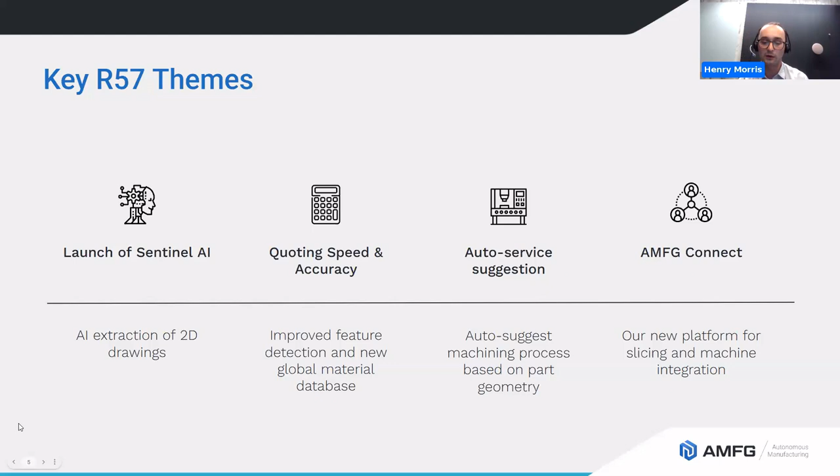Yeah, if I just talk a little bit more generally, we do at AMFG 3 to 4 releases in a year. This one being the second of 2025, and we really have one key theme per release. And if you go back to the last slide where we said our mission is to enable faster and accurate quoting for small, high complexity shops, with this release, we really have built a number of features for CNC shops.

So for additive quoting, we started that journey maybe 5 to 10 years ago, and we're quite solid in that space. These features we're releasing here are really going to plug the gaps on the CNC side. So one, with our Sentinel AI, we're able to extract much more information than just the 3D file. Similarly, with improved feature detection, all of this is giving us more data on the files that you upload into AMFG, so that our pricing scripts have more data to work with and can be more accurate.

And then thirdly, with auto service suggestion and materials, we're almost lowering the barrier at quoting so that someone who's maybe a more junior estimator can still quote effectively using AMFG. So the key for R57 is rounding off kind of the CNC quoting package. Not that there won't be more improvements in the future.

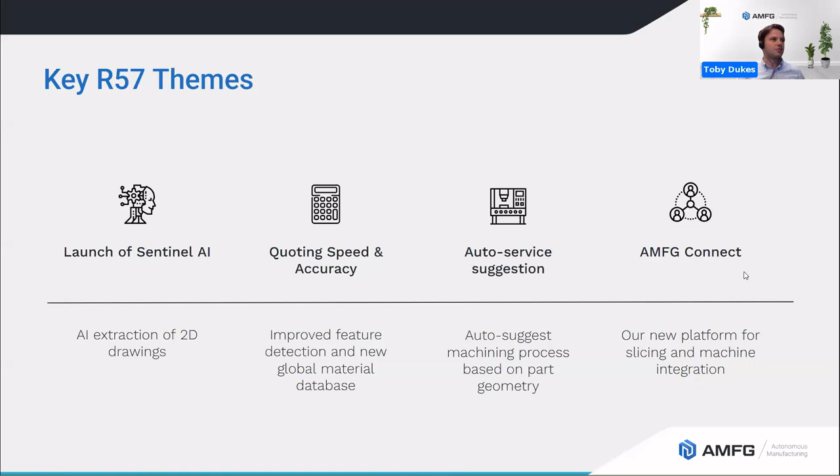And then as we look to our next releases, so R58 scheduled almost for the end of the year, we look more to production, and that's really what AMFG Connect and integrating with slicing and build preparation software is preparing for. So we have kind of 3 key themes on finishing off our quoting package, and then 1 theme on the start of our next big package. So really exciting new features here.

And I guess that leads quite nicely into the first one and maybe the main story point of this release 57. So we are releasing, as Henry said, our own AI extraction model for PDF data named Sentinel. So when we started CNC quoting, it's all about how much data we can get from files. And we started with 3D files with STLs, trying to extract the features, so holes, pockets, islands, through holes, all those 3-dimensional features from the file.

But we realized when we started this journey, we were limited in that information. Unless there's, say, PMI data, we're missing critical dimensions in tolerance, in surface roughness, in threaded holes. That's all going to add on cycle time and therefore going to add on cost. So moving on from our 3D data extraction, we're extracting data from the 2D drawing directly using our model, and we're automatically adding that into our pricing scripts, all with the aim of quicker and faster quoting.

So more specifically, you can upload your PDF alongside your 3D model in AMFG and extract material type, extract general tolerance, dimensional tolerances, surface roughness, and threaded holes. And you can use this instantly in your quote.

And maybe just to jump in here, Toby, I think you can probably follow up on this. I think really this is a big first step in our 2D data extraction journey. Setting this up has taken a long time. It's put a lot of resources into it, a lot of development time to building Sentinel and actually launching it. But I think now we've actually got it live, the kind of next steps in what we can extract is really the world's oyster.

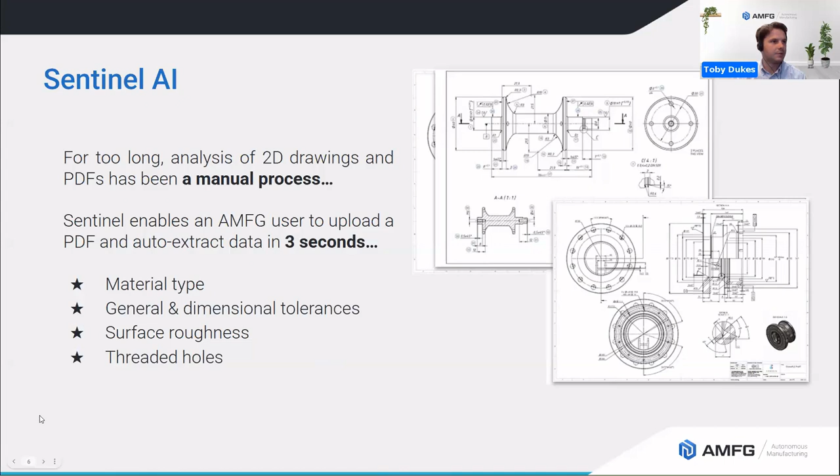Yeah, absolutely. Should we move on? Let's move on.

Number two. Again, this follows on. It's all about the amount of data we can extract, like I said at the start, from the model and then from the PDF to get that accurate quote. The features that we're drawing from the STL file or the STEP file, whatever you upload, are really the core of how we quote. So we're improving our feature detection and we've made it more rigorous. We're detecting almost 90 to 95% of features on the part, and we're adding new features to that list. So previously, where you had maybe just a hole and then a pocket on that, we can now detect that as counterbore and countersink, which means we can be more accurate with the tool and the cycle time, as we know you can get one tool in there.

So we've made our CAD interrogation program more sophisticated. We're counting fillets and chamfers, counterbore and countersink holes, slots, and steps. This really rounds off what we're calling the core features of the part. So after release 57, we think we have the most robust CAD interrogation system on the market. But what we're moving to next is to detect what we're calling difficult to machine features, one of which is self-intersecting holes. They're normal features on the part, but maybe an area of the model that would take a different machining strategy or a longer cycle time. We're trying to call that out to you when you're doing a quote: one, to add on machining time for the quote, and secondly, when you take that into production, as a flag on the part that this may be difficult or even impossible to machine.

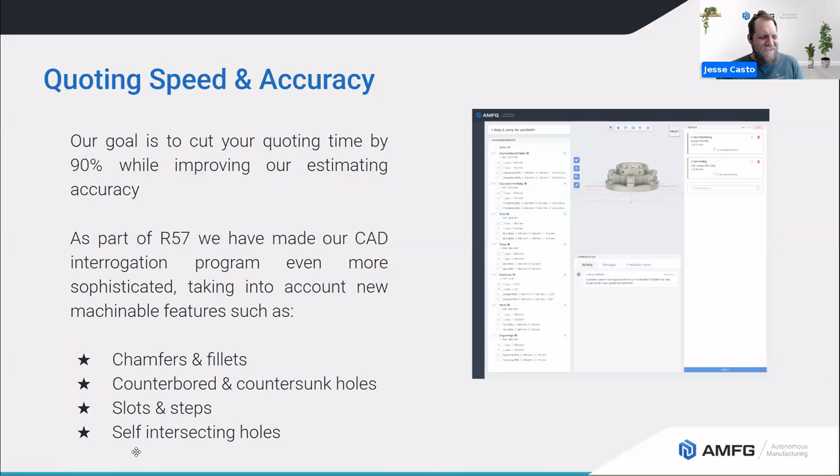Okay. Next feature then. So again, new in 57. We realized we had a gap, like I said before, in tolerancing, and specifically assigning tolerancing to features. We realized through speaking to a lot of customers that whilst our feature detection is accurate and we can get a good cycle time, maybe the one most important thing we weren't considering was the effect of tolerance on that cycle time. So obviously, if you have a tight tolerance, 0.05, 0.01, on a specific through hole, that can add on 20 minutes, 30 minutes cycle time per hole.

And this was one data point that we weren't really capturing in our scripts before. We can now say with a lot of pride that we're able to do that. So we can assign a tolerance or a surface roughness to a feature. We can assign it to holes, fillets, planes, pockets, whatever 3D feature you might want. You could assign the tolerance or the surface roughness, and we can automatically update our pricing scripts based on that tolerance, which really means for those highest complexity parts where tolerance is such an important factor to cycle time, you're able to quickly and easily factor that into the quote. So again, leading back to our theme of accurate quoting and fast quoting.

I think it leads on to a future when we move into production where we already know tolerances that are on these specific features. So when you go to machine that through hole with the tight tolerance, we can flag that to whoever's producing it. But at this moment, we're getting as much data as we can on the model, and I think tolerance was the one part we were missing. So really excited to bring this through. I think this is probably the number one, aside from maybe PDF data extraction. It's probably the most requested feature for the CNC machining product in the last 6 months, probably even a year now. So it's really exciting to see this come to fruition.

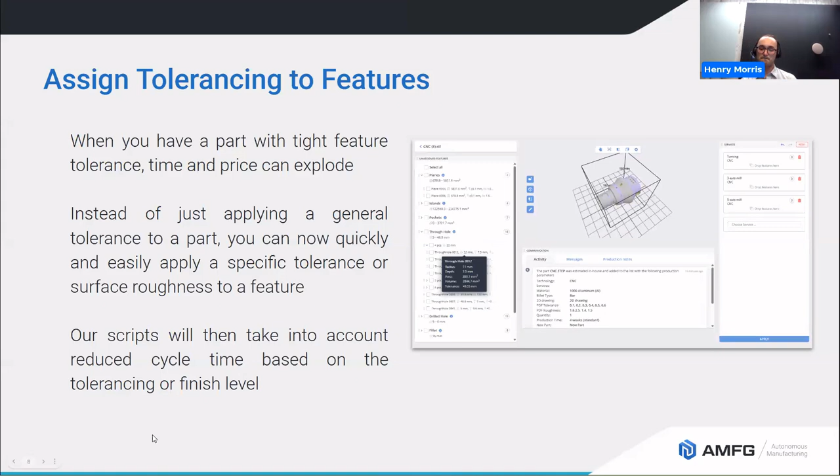And maybe the unsung hero, as I'm calling it, of our release. Not the most fancy or the most attractive feature, but one that brings immense value to our users is our new global database. This has been a huge piece of development from our team, so we're really excited to bring this one forward. Just to set the scene for people who've never used AMFG, we previously had roughly 400 materials in our database, and everything else, materials cost, feed rates for milling and turning, was managed through our pricing scripts, which meant if you wanted an update, it would come via the AMFG team.

So we can now say we've added a new global database based on the top 3 material suppliers worldwide, of which we have 10,278 materials, I believe. Very precise, Toby. I like it. I'm going to eat my words if that's wrong later, but it's around that number.

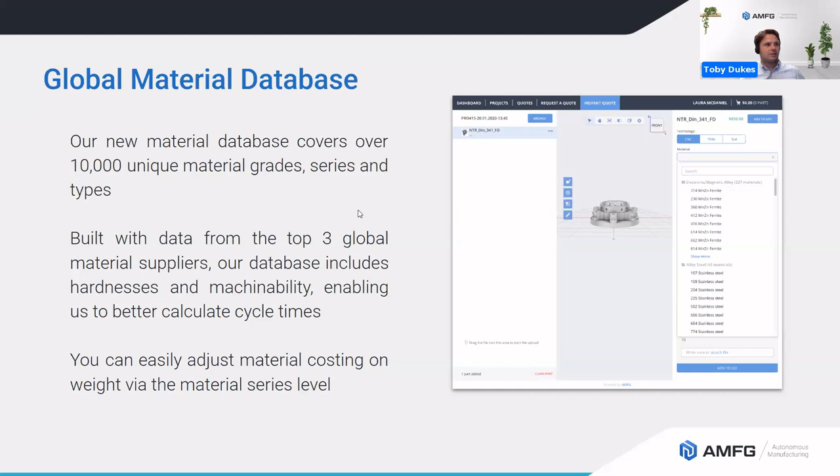So maybe if it's got a lot of cylinders, we'll suggest turning. We can suggest milling, turning, drilling, whichever operations you have, automatically when you upload the part. You can obviously edit that. You can maybe change 3 for 5 axis if you prefer to run it on that. But what we're giving you here is almost a baseline recipe of how you may machine the part. Again, it leads on to our accuracy in quoting and our speed in quoting. You upload your file, you've auto-suggested services, and then you have a price.

So what we really wanted to do with this release is almost give a 2-click approach where you upload the files and AMFG does everything else for you. You have your costs and the materials, you have your services assigned automatically, you have all the data that we can extract pulled, and then it's really up to the user. If you don't like the cycle time, maybe you add a tolerance manually. If you don't like the material costs, you can go and adjust that. You can assign features to services, which will adjust the price.

But we're giving you a 2-click approach to get as accurate a price as we can, and then leaving it up to the user to make those small end tweaks. Obviously, with the theme of accurate quoting, we aim to make that as limited as possible, but we realize we need to give the shops the power to edit that. So this is kind of the last stage of that.

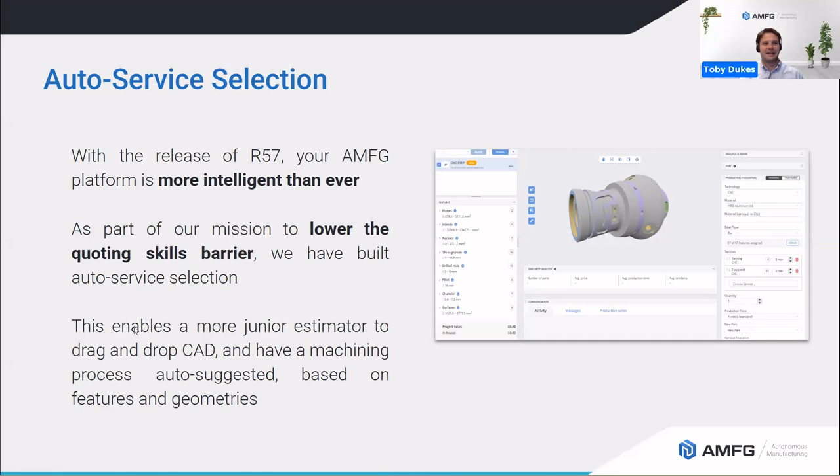Enough talking. Okay, Toby, I'm going to steal the screen and we'll get into a bit of a demo here. As Henry knows, slides are my least favorite thing in the world, so I'm very excited to get off them and into the AMFG app. And look at this, to say I'm working in a tech firm, I'm pretty slow here. Let me know when you guys can see what I'm sharing.

All good. Awesome, fantastic. So I thought we'd start off by giving a bit of overview of how AMFG works right now, to give you a live overview of our calculation procedures, the way that we get to a geometric analysis, how we get a time and a cost result. And then Toby's going to jump in and show how we're going to improve that with the new R57 functionality.

So obviously skipping over some of the more basic parts of the AMFG system, like the dashboard, where we're tracking analytics and KPIs, and our email integration, where you can have your emails linked, so you can see your emails coming into your inbox from RFQs at Better CNC or any other emails you'd like integrated, we're really looking today at tickets overview, the quoting and estimating module of the AMFG system.

So in here, we can see all of our part statuses. We can see as those RFQs come in, where they've come from, whether it's from a website inquiry, an instant quote portal like Jesse's, whether it's from an email, or maybe you've manually created this ticket, this RFQ. We can attach priority statuses to earmark how urgent that quote may be, how quickly your customer might need a response. We can have your own ticket numbering system. We can have an activity log to track what's happening and when.

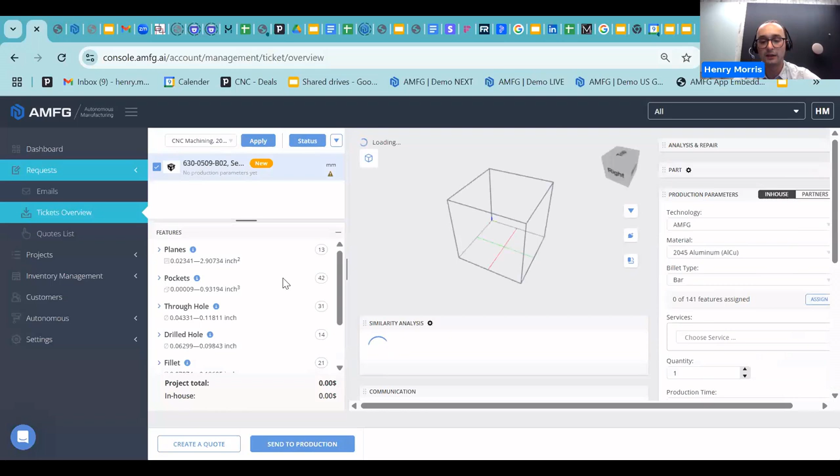Now I'm going to also choose my customer. Obviously, if this came from an email, I'd already have that customer pre-selected, but let's say I've just done that manually. And now we can actually load into this part and start taking a look at how this part looks. So as soon as I load that part in, the first thing that I can see is probably these pink blobs, our geometric analysis on said parts. And we've got to repair that part as well.

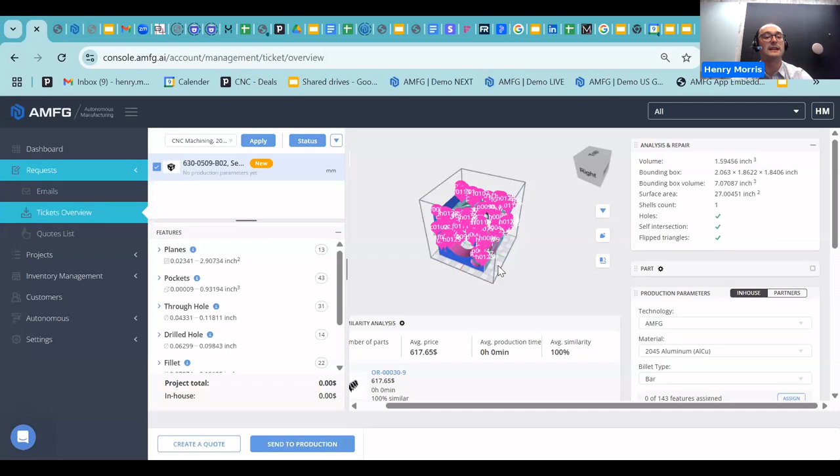Now, when we hit repair, we're converting this file from one of the 30 different 3D CAD formats that I mentioned earlier to an STL file format. That then allows our CAD interrogation program to do a full geometric analysis on the part and pull out all of the different machinable features and the part analysis here in the top right.

So as Toby mentioned earlier, improving and making our feature recognition more sophisticated has been a key development priority for us. How many different machinable features is it that we can identify now, Toby? To put you on the spot. I love being put on the spot. It's fine. There's 9 machinable features that are available. That includes planes, pockets, through holes, drill holes, fillets, chamfers, counterbore, countersink, and islands. I really hope that was 9 that I just said.

Like Henry said, we pretty much reached the limit of all our machinable features that we want to pick out. All we need to do now is flag difficult to machine features, so maybe undercuts or holes that are self-intersecting, to make this more robust. Definitely. Well said, Toby.

So as Toby mentioned there, we're pulling out all of those different machinable features, and we're also looking at the profile of each of those features. So for a through hole here, we know the radius, the depth, the area, the volume. If we take a chamfer, we know the angle and the height. So we're building up a very good geometric profile on our part.

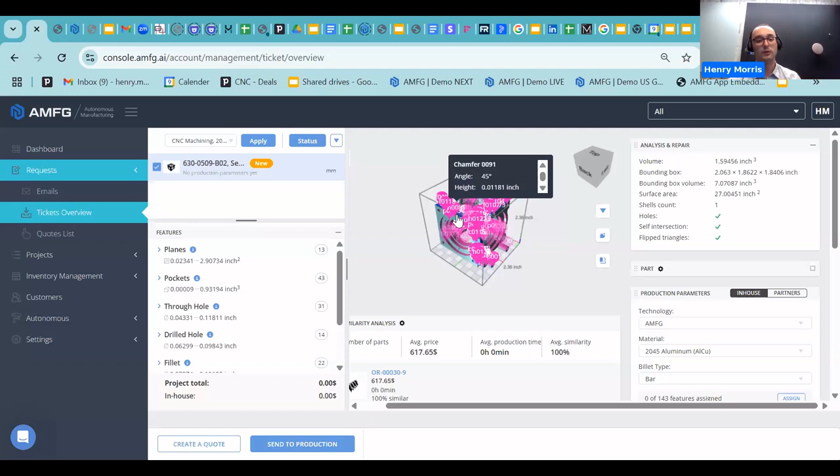We also know the volume, the bounding box volume, surface area, which is obviously all really important as well for calculating our material price based on weight, the density of that material, and also for secondary processes based on either the weight again or the surface area of the part.

Now, before we jump into actually estimating on this component, we can also have a look at our similarity analysis. Similarity analysis really is a bit like a third eye in the quoting process. We're basically comparing this new part to all of our historical parts that we ran through AMFG, normally based on the material, the bounding box, maybe even the machinable features on that part, and spitting out a list of similar parts that you might have machined in the past.

So really great for part families, and also really great for repeat work that you might have forgotten about, maybe you want to forget about that repeat work, or maybe it's work you've done in the past, but a new estimator like Jesse's new guy doesn't necessarily know that you've done that in the past.

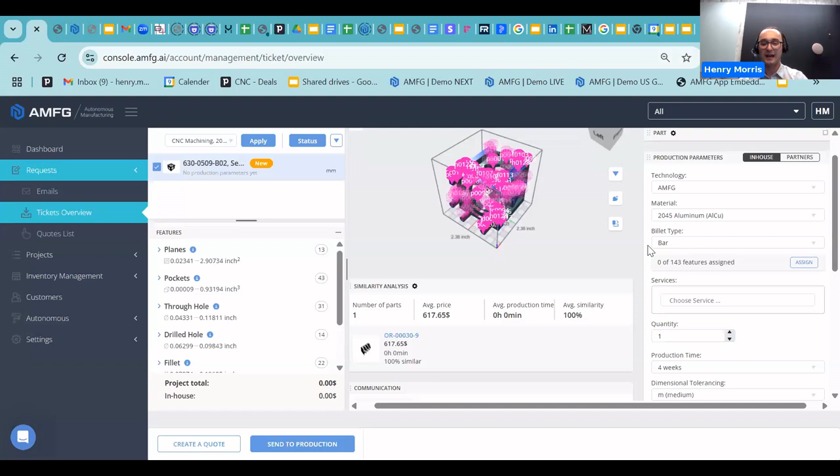Now, if we go into actually generating an estimate, we're going to look at production parameters on the right-hand side. And obviously with this new update, there's been some pretty big changes in what we've actually automated in this quoting workflow. But this just gives you a rough idea of how quoting might look in AMFG. So first of all, we can choose material, and we've got that new beautiful global database that Toby was very proudly talking about earlier. So I can select my material.

We know the hardness and the machinability of that material. We can choose a different billet type if we want to change that based on whether we're machining here from a bar, a solid round, tube, plate, casting, and a few more. And most importantly, we can now also choose machinable features, machinable surfaces and processes. Now, obviously, as Toby mentioned, we can now suggest that ourselves if you wanted to have that automatic suggestion, or your estimator can come in, choose a service, and we're then going to create a calculation based on that.

So our scripts in AMFG are now quite highly sophisticated. We've done a lot of work to them over the last couple of years. And what they're able to do is accurately ping back a cycle time, programming time, setup time, and number of setups on this part. We can then see that for this part here, there's quite a lot of features, and we've also chosen, I think, machining from a bar. We have 33 minutes as our cycle time, 546 minutes as my programming time, 210 minutes for setup, and 2 as our number of setups.

Just conscious of time to quickly explain how we got to those numbers. Cycle time, we're looking at all of the different machinable features on this part. We're then looking at the material and the hardness of that material, any tolerancing or surface roughness factors that have been added in. And then we're basically auto-assigning a tool, either from AMFG's library or toolbox or your own tooling data, to match a tool to each of those machinable features. We're then calculating a material removal rate based on those factors. That then gives us our cycle time.

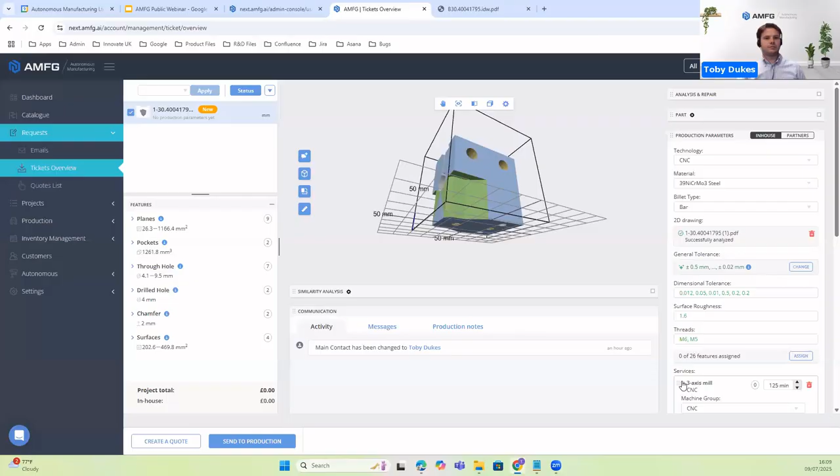Now, on that note, I'm going to hand back over to Toby. That's where we are now, and Toby's going to show you what's coming out on Saturday. Yeah, thanks, Henry. If you just unshare again, and then I can share my screen back. Okay. See that okay? Okay, so

Building on from what Henry said, I'm now in our next application, which has all our new features on that will go live on Saturday. So you can see largely a similar screen. We have our list of features on the left-hand side. We have a new viewer, which is showing the features in colors rather than the dots you saw. And we have some widgets that are now made collapsible by popular request.

I think the real key difference, though, comes in the production parameters widget, which is the heart and soul of the quoting tool. So like Henry had all of his fields that he was able to manually configure. We now have a new field of 2D drawing, of which I've added the PDF for this file. And you can see below this, I'm able to extract my general tolerance, my dimensional tolerances, my roughness and my threads.

So when Henry was clicking through all this information manually, all I've done for this file is upload the 3D model, upload the PDF, select a material, and select 3-axis milling as my service. And you can see all those steps that Henry just did, I'm already at my price. So the key is we're uploading just 2 pieces of information. We're gathering everything from that. We're using these features from our 3D file, plus the information extracted from our 2D file in the scripts that we talked about earlier. And we're using that to generate this price here.

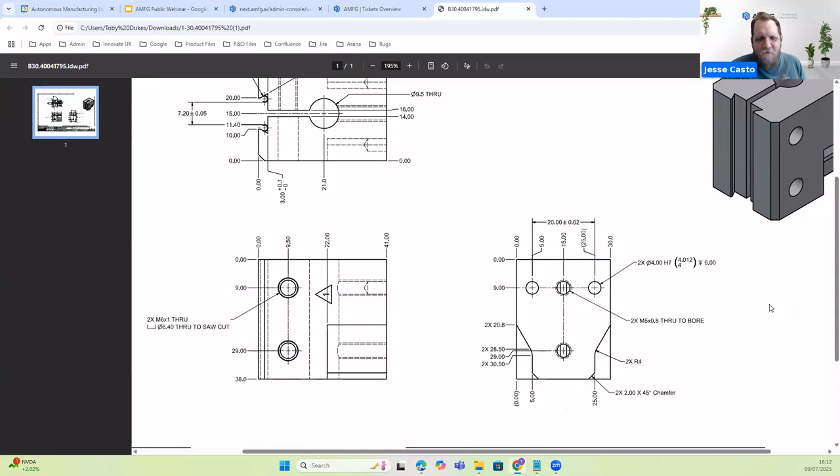If you look over the drawing a little bit, you'll see tolerancing in different formats as well. Like you got the H7 where it's 4.012 to 4. The top left, you got plus minus 0.05. And the PDF analysis is actually not just looking for a key, like it's not just looking for the plus minus symbol. It actually is able to recognize the different formats that things are written in. Which means it's not just a generic slap AI on it, look for these phrases, but it's actually analyzing it and pulling out the different types of formats, the different types of callouts, both for threads and tolerances.

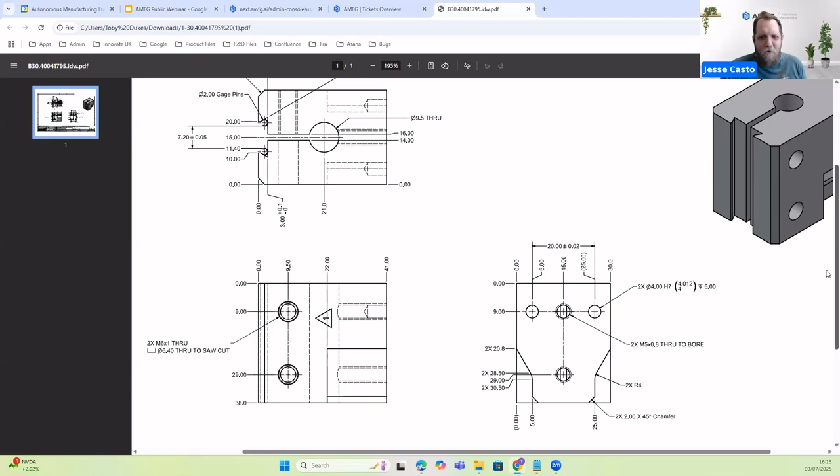And then if you scroll down to the tolerance block at the bottom, it's able to recognize that over on the left. It's also able to pick that out and pull out your generic tolerancing levels as well. So it's not just we're slapping AI on it and it's just looking for a keyword, but it's actually looking at it and pulling out key features that you can set up to affect your price to the customer so that the quote is as prepared as it could possibly be before you even dive into it to quote.

Exactly. Thanks, Jesse. I think the key for this with us was extracting as much information to use in quoting. Where we use automated scripts for quoting, we have to run the same thing every time. So if on one condition we pull it out as plus minus 0.2, and then the next file you upload we do 4 to 4.012, there's no way we can consistently use that in our script. So we've really tried to pull it out in a very consistent way to get instant pricing.

I think the next thing to show then is our new material cost. So you can see now from Henry's viewer, we got a new view where I can search from all the materials from AMFG or just the ones that a specific shop has selected. I can view my recent materials that I use most often, and I can review full families in these folders. So I can search by my titaniums and select a grade there. You can see I've gone for a steel alloy, and I'm now going to change to a titanium.

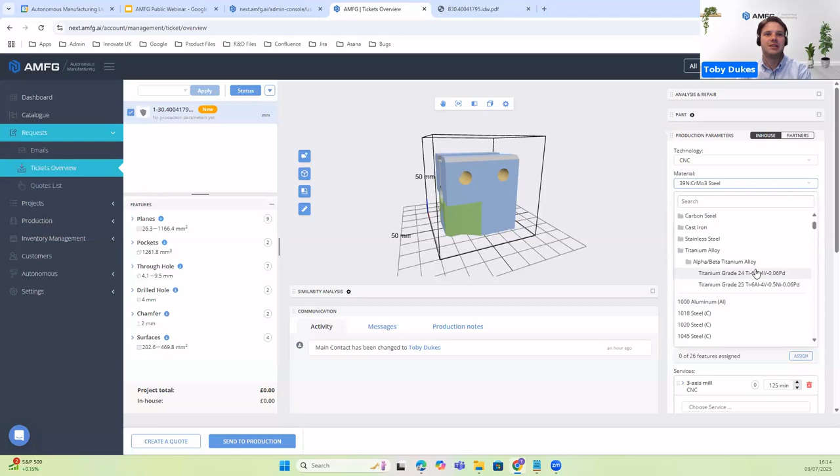And this is automatically going to factor, one, the different cost per kg of titanium, but two, the different feed rates of that titanium. So maybe I'll have to run my milling machine slower if I'm using this titanium material, and that'll automatically input the cycle time and the production cost, which is what we call the material cost. And if I don't like that, I can go into production parameters, which I'll show you in a minute. It's almost our data storage hub. And just update those values as they change.

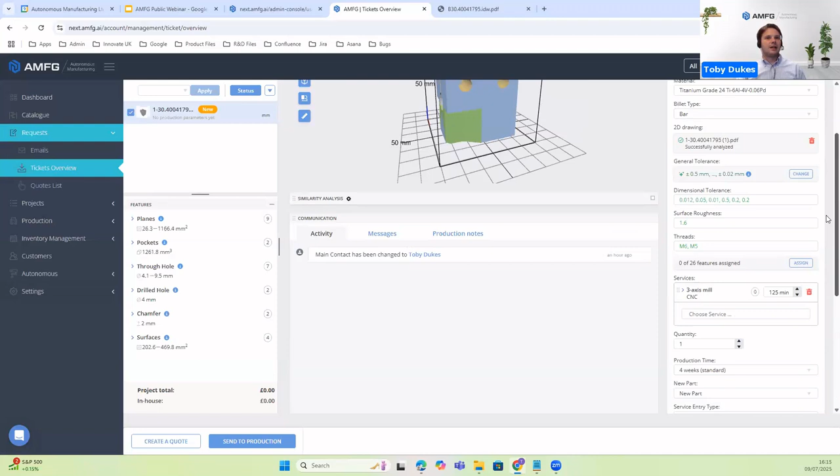So the key thing is I've filtered my materials by categories. I've changed some parameters, and my new materials give me a very different cost. I think next, let's look at specific tolerances.

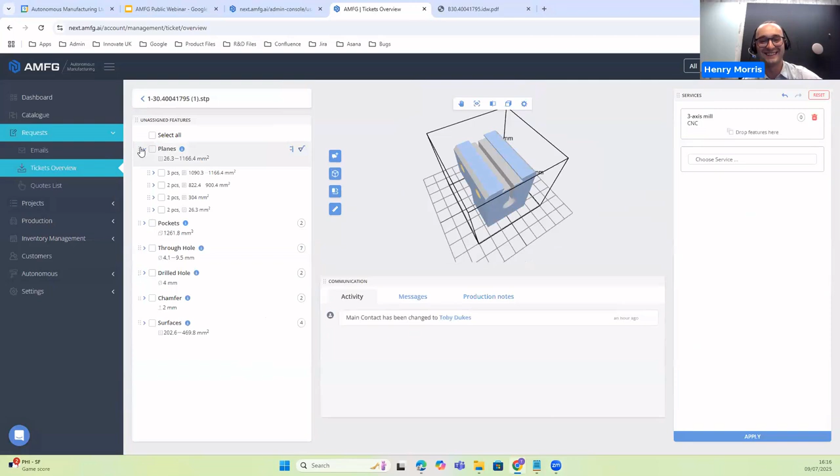I cannot believe there's only 15 minutes left. It's so exciting. Time flies when you're having fun. My brain goes into overdrive when I think about tolerances.

Okay, so here we want to go one step further. It's not enough to just extract the tolerances from the PDF. We want to assign specific tolerances maybe to holes or to drilled holes, because we'll use a different tool for that hole, or we'll use a specific machine, and we want to say that we have to run that machine slower for this hole. So what we've allowed you to do is come onto this assign features page, and you can set a tolerance or a roughness per feature or for all features.

So for this example, I'm just going to set a tolerance of 0.001 upper lower limit. And you can set a limit that can only be higher than a certain point, or there's plus minus. I will assign that to all through holes. So I can now see on each of my holes, I have this tolerance input. I can do the same for roughness.

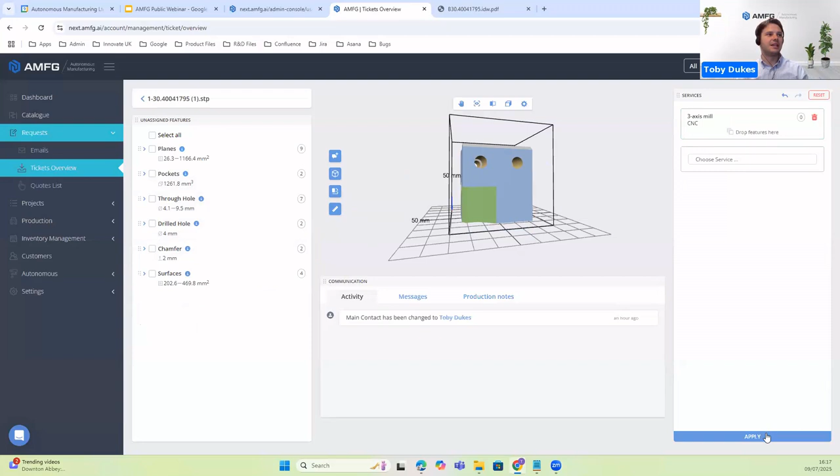If I wanted to, I could assign these holes to a service. So I could say, actually, I'm going to use 3-axis for all my through holes and drilled holes by just drag and drop. And maybe for the chamfers, for the fillets, I might use 5-axis. But the key thing here is once you've assigned your tolerance to the hole, we rerun the price. You can see previously we had 733 for 3-axis milling.

Because we've assigned those tolerances to those features, our scripts understand that we need to slow that machining time down when we machine those holes, and therefore the cycle time is longer, and the cost of 3-axis milling has also gone up. So it was 730, now it's over £1,000. So the tolerance can really add on a lot of time and a lot of costs. So if you have those really high complexity parts where an accurate quote is essential, you can go through this extra step to get a more accurate price.

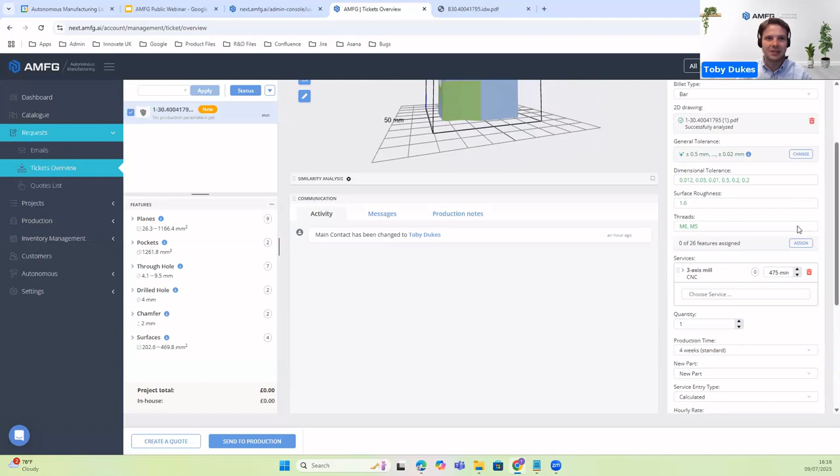And I think this leads on to where we're going with our PDF extraction and with our tolerance assignment. Obviously, we have information from the PDF of what features these tolerances are on. We have our 3D features here. I think the next step for us to really automate all of this is to match these 2D tolerances to these 3D features and essentially automate the step that I've done here. So where I've manually come in and added a tolerance, we want to automate that step so it really is just the 3D, the 2D, and you're good to go.

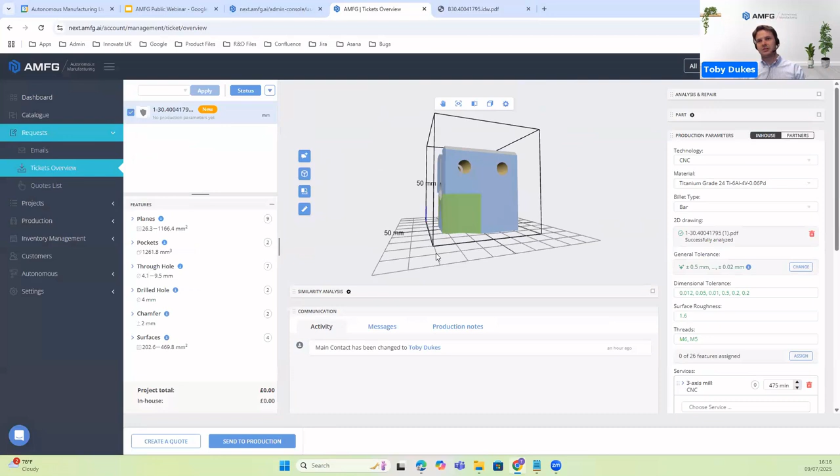Jesse, it'd be great to hear a few of your thoughts as well. Obviously, we've spoken about this quite a bit over the last 6 months about the impact of PDF support and how you're applying tolerancing. How have you found that so far?

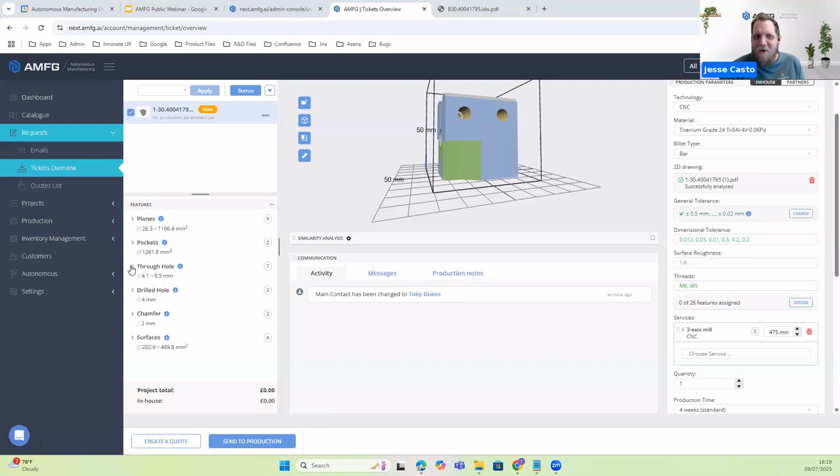Yeah. Nice thing too is as you apply tolerancing, the way it affects the price, you can also do it for specific features. Like if you have a tolerance on a through hole versus on a pocket, you can apply it differently. Being able to do that helps you pass notes or remember things as well. If you quote something and you win the order 2 months later, you have reminders for you.

One issue I used to have at another company when I did quoting, we did finger in the air quoting, where you look at it and you go, okay, that needs to be about 20% higher. Classic. Being able to add these tolerances to specific features gets rid of that variance. You could look at a hole one day and say, oh, that's no problem. You look at it a couple days later and you're like, oh, that's going to be a

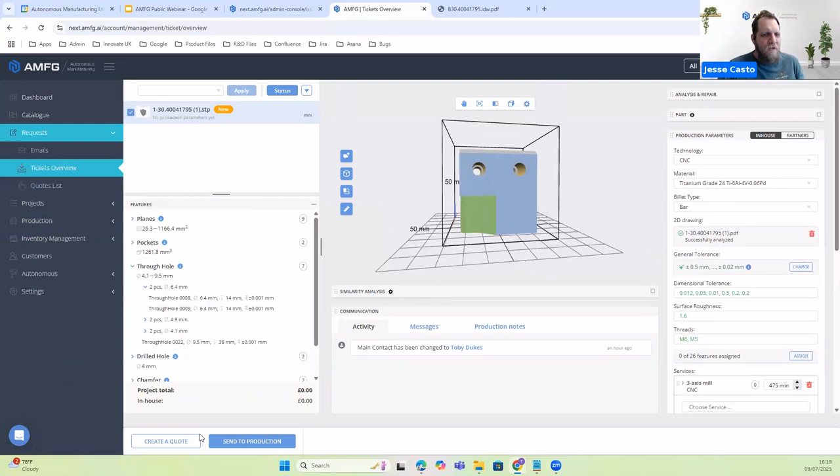big pain. Being able to apply tolerances not only helps you remember at time of order, but it also gets rid of that variance that comes with being a human quoter. Everything's at a set baseline. You're going to be the same every time for every customer.

Yeah, I think it's a great level of stability across the board, especially for tight tolerance, aerospace parts, critical things like that. This feature would have already saved me some troubles on other things I've done. So we'll be diving into this and taking more advantage of it as we go.

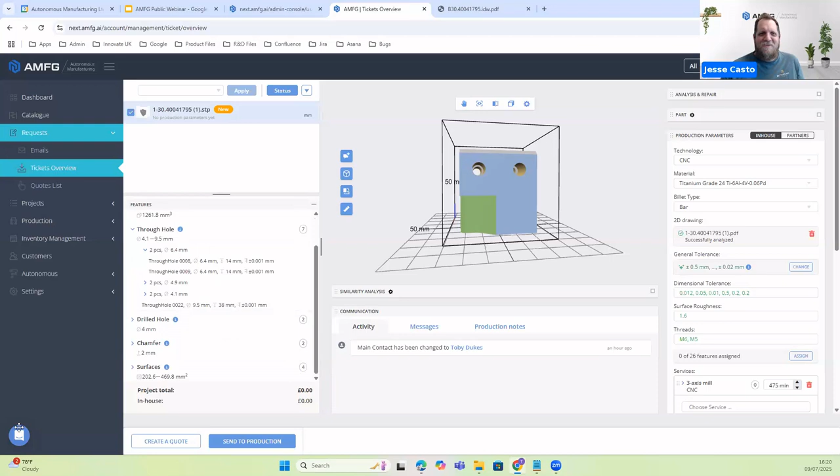And I think it's leading into something I get asked about a lot. People say, "Brilliant, you're taking into account tolerances, but how are you actually taking into account tolerances?" It's okay making a note of a certain through hole with a tolerance note on it, but what are we actually doing with that? We're trying to get to a point where we're not just applying a basic scaling factor to the machining time around that feature.

We're simulating what you would actually do around a tighter tolerance feature. So slowing the cycle time right down, potentially choosing a new tool, potentially recommending a different machine if that's suitable for a drill hole, or needing a jig bore, or even suggesting doing another lap on that feature because of how tight the tolerance is. So it's not a blanket scaling factor. It's taking into account how you would machine around that feature.

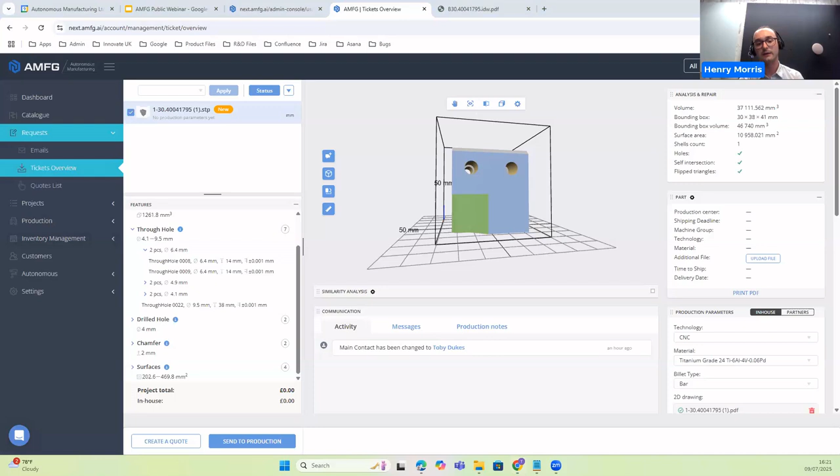Okay. Sorry, Jesse, you continue. I was just going to say, it's still fully customizable to however you want to approach it. It's not just a generic solution everybody gets. It can be tweaked and adjusted to your shop, to your facility.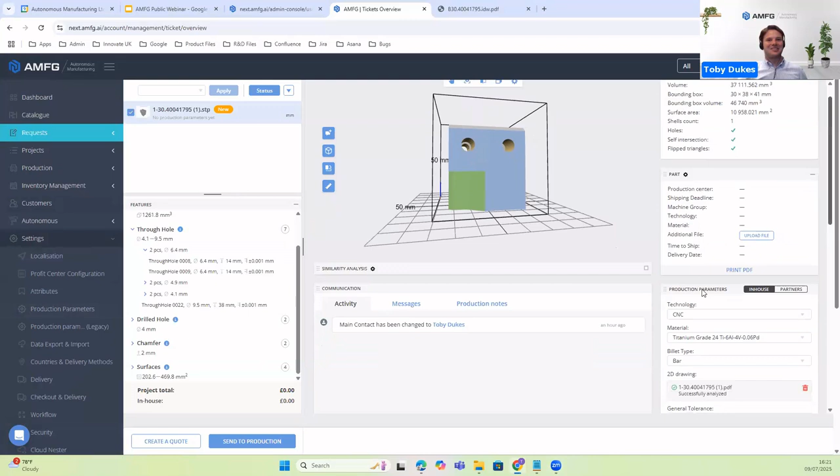That's almost a perfect segue into how you adjust these things, where it's not scripted. The next thing I was going to show was our data hub. This material, titanium, has information stored with it. It has a material cost, a milling feed rate, and a turning feed rate. So if you don't like the cycle time or the cost, we can come into our production parameters page.

This is where we're storing all the data on machines, on materials, on your services. So if I want to adjust my feed rate or my cost, I can come in here. I can click on the material, and you see I have this 6000 series aluminium. I can adjust my cost per kilo, my milling feed rate or my turning feed rate, and any custom parameters that you want really.

Say hardness is a big factor, maybe the material specs change slightly. You can just adjust that here, save that, and then you don't need to do anything else to our scripts.

The next time you go on a quote and you use this material, we'll use this £3.50 and these factors here. I think this can be used for anyone using our scripts. So same if you have additive materials, you can maybe adjust the infill rate. You could adjust the layer height of that material, and again the cost, and automatically use that in the workers.

So this is where you're going to store all your information and materials and machines as well. And then it's just one place to store all data, to input all data, and then when you're in that ticket details page that we showed many times, you're really quoting. Your whole focus is on fast and accurate quotes.

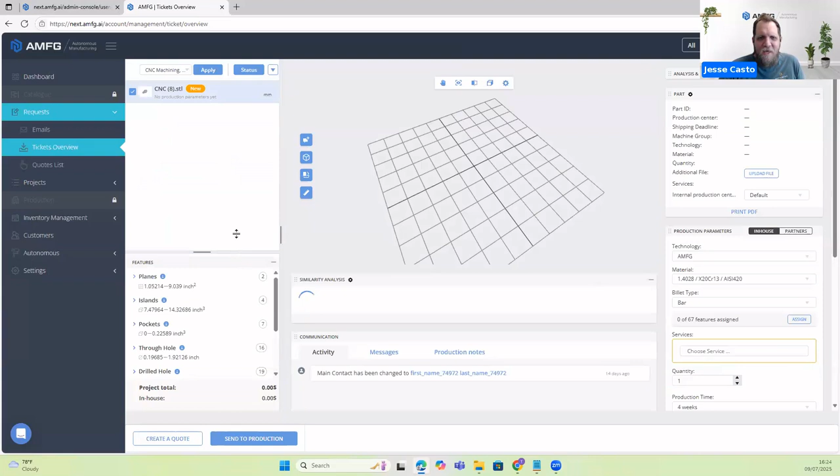Oh yeah, it's come up more and more for us, especially with tariffs. We can't just assume price anymore at the moment. But also as we get quotes and estimates with more exotic materials, being able to tie into a catalog of a materials distributor will be super helpful in just automating and speeding it up. Because usually at this point, getting material pricing is the slowest part of the puzzle, just because we have to wait and go back and forth, particularly on larger quotes, larger estimates, or exotic things.

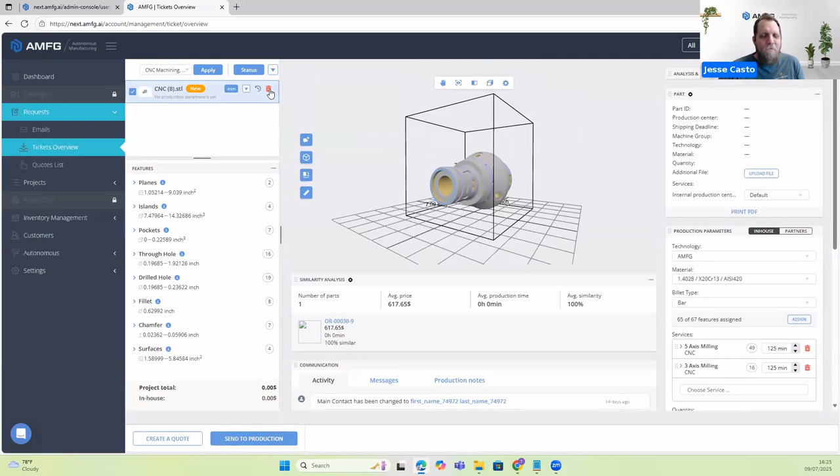But yeah, the integration and tie-ins to material suppliers will help alleviate that and make it to where we can quote production a lot faster. We'll be able to get faster pricing for exotics, things like that. So definitely that's the last part that'll speed up our whole process, even for bigger orders. It's coming. It's on the agenda. David and his team are working really hard on not just this, but a whole plethora of different updates over the course of the next 12 months and beyond.

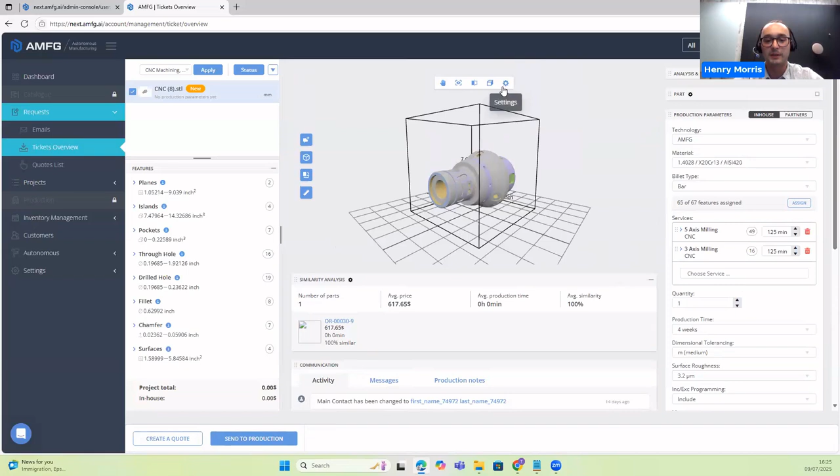I also wanted to, I know it's probably not on our plan, Toby, but talk a bit about the new 3D viewer. Jesse, I know you've been using this for the last couple of months. How are you finding some of the views? I love the X-ray view for looking at internal geometries and really getting a better idea of that. And then some of the manipulation tools that you've got on there as well, like measuring and changing orientation. One of my favorite things is just having this layout, being able to have everything that you need to see when you quote on the same screen.

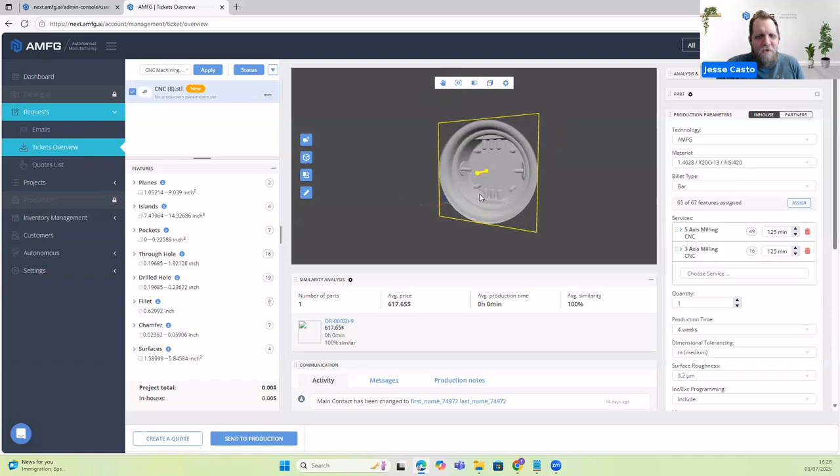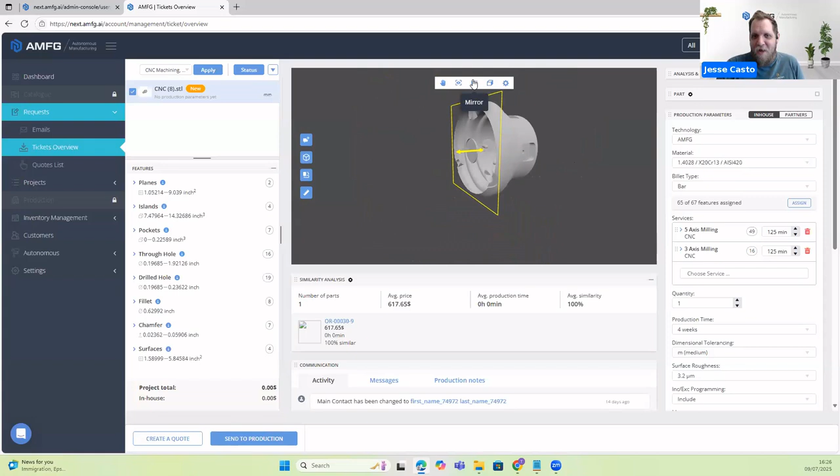And particularly, what you're looking at now is a good example. When you're looking at X-ray view or section views, it helps you see, let's say, cross holes, odd angles, things like that. You can make it stick out a lot more. I've had a couple parts where there's very subtle undercuts, just enough to make a part complex in a hurry. Being able to have this view instead of having to upload it into my CAM software and look at everything in detail there, I can just look at it all here, which saves quite a bit of headache.

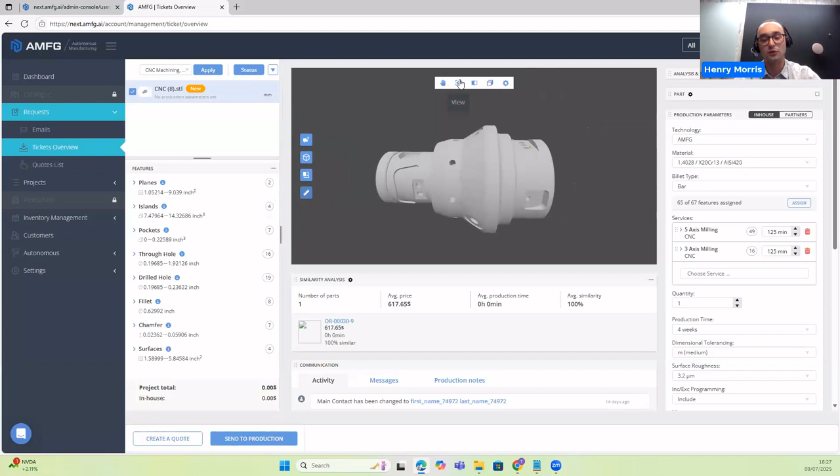Definitely. And this is why we need to be screaming and shouting at our buyers, as much as we love them. They are our customers. Send over 3D models, especially for milled components, for the more complex stuff. If you don't have a 3D model alongside that 2D drawing, you're just unable to understand the geometries, especially internal geometries, on a PDF. At least in our experience. Jesse, I don't know whether you've seen the same thing for some of your customers. Oh yeah, and even the online quoting portal, even my business to business customers will jump on there to look at the parts real quick. Nice. Get themselves a ballpark pricing, see if there's any issues that crop up.

Just to get an idea before they place an order with us at a later time. It helps them going through their prototype phase, set budget lines, stuff like that before they order from you.

Brilliant. I'm just conscious of time. We've only got a few minutes left of this webinar. It's gone pretty quickly. Definitely surprised. Maybe we like the sound of our own voices too much, guys. I'm not sure. But here we are at the end.

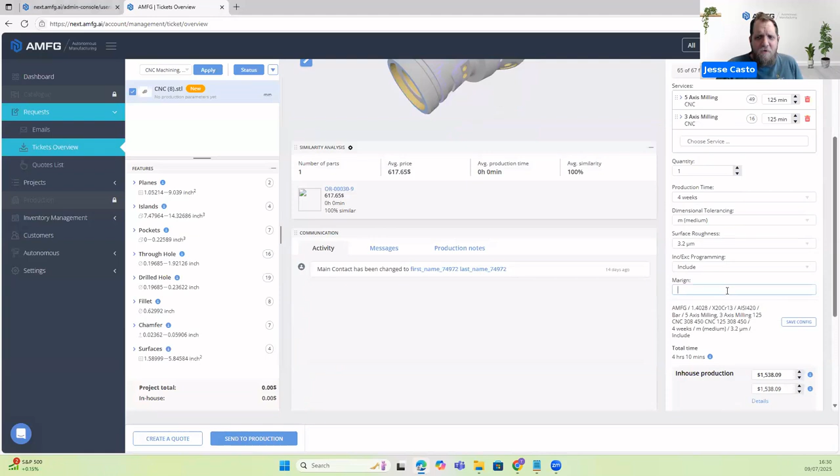Yeah, we have, let's say, just generic markups on things. And I've started using the margin box as well recently, where if we get certain things, we can force it up, force it down.

But yeah, no, there's all kinds of ways you can integrate that. I think with the new tables, I'm going to dive in a little bit further and see if, let's say, change some of my rates in general for harder metals. Not just because you're cutting it slower, but also because there's fewer people quoting it, I can have a higher margin. So I'm going to start applying that as well with these new tables.

And we've seen all sorts as well when it comes to margin and costing strategy. Everyone seems to have a different approach, which is good. Otherwise, everyone would be quoting the same price, as we've spoken about a few times. We've seen margin applied obviously to material. We've seen it just applied on general job level, applied to secondary processes, whether they're in-house or external.

We've seen it applied on different machines, how you apply margin for those different machines based on how old, running costs. I've seen energy costs be taken into account. You can almost have coffee breaks in there as well if you want. It really is quite configurable. With your customers, you're able to set customer groups, or for individual customers, you could also adjust your margins or your shop rates at that level as well.

Because we work with a very broad spectrum of customers, where we've done parts for NASA, for the government, but we've also done walk-ins where we're fixing a part for an antique clock. So you could actually even customize it to where my business-to-business customers will get a little bit higher rate because there's more administrative costs, relationship building there.

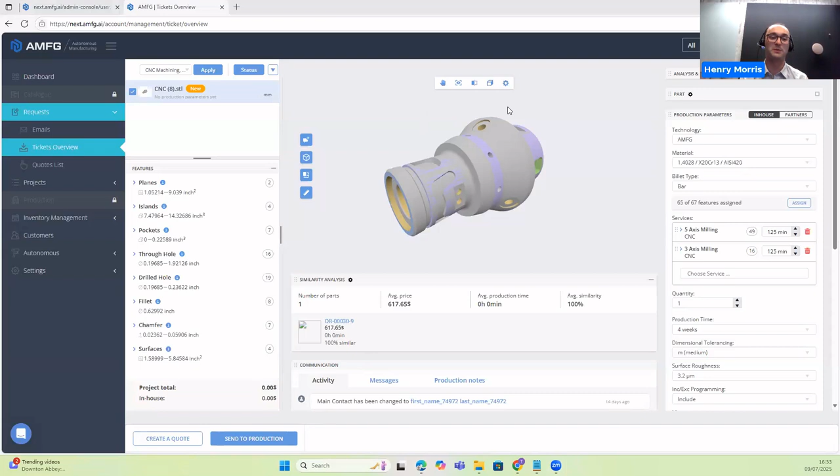Jesse, I don't know whether we'll have the honor of you joining us again. We'll have to see if we can book you in. I know you're a busy guy, so we'll speak to you about that as well in the future.

That'll work. Awesome, guys. Well, thank you all for joining us today. We are super excited about these new updates. You'll see more about this on social media, and for all of our active customers that are using AMFG, this will all go live on Saturday. So by Monday morning, you can have your coffee and start seeing these features in effect.

Guys, anything else you want to add before we wrap things up? No.

Yeah, I just think if you look at this whole system with this left sidebar, we've been in one page almost the whole demo, the whole webinar. So there is a lot more functionality AMFG can offer, like Jesse alluded, customers, production. But we're really focused on quoting this release.